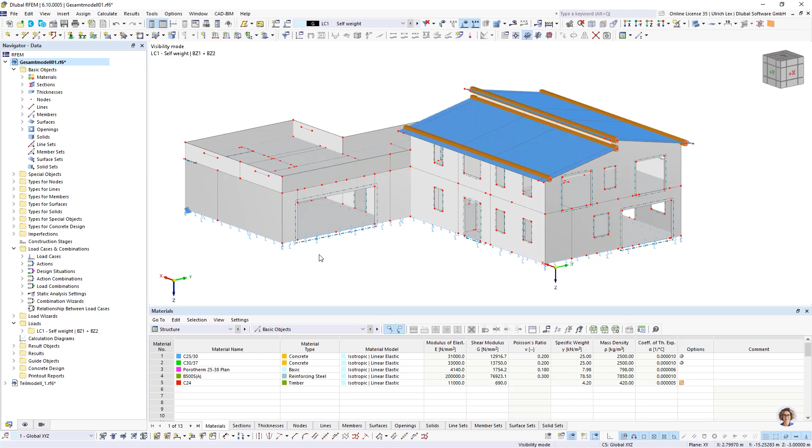On this garage it should be considered in the planning phase that the customer has the possibility to create a new living area on top of the garage. The difficulty is that maybe the concrete slab has to be designed for both load situations. There are different loads at the different stages, and this is what we want to consider with the add-on construction stages.

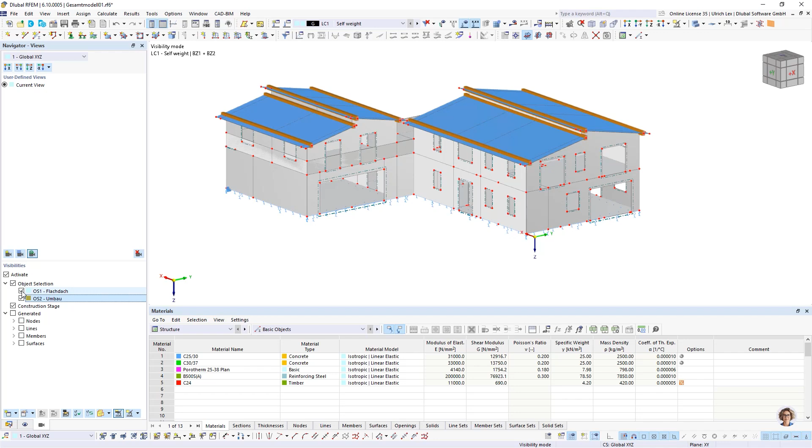For a better overview, just a moment, I've created some object selections where we can show this second stage with an additional living room, and the first stage with only the garage. For a better overview, I created as an example for today's webinar a second file where I have only modeled the garage, and I do not want to look today at this general building.

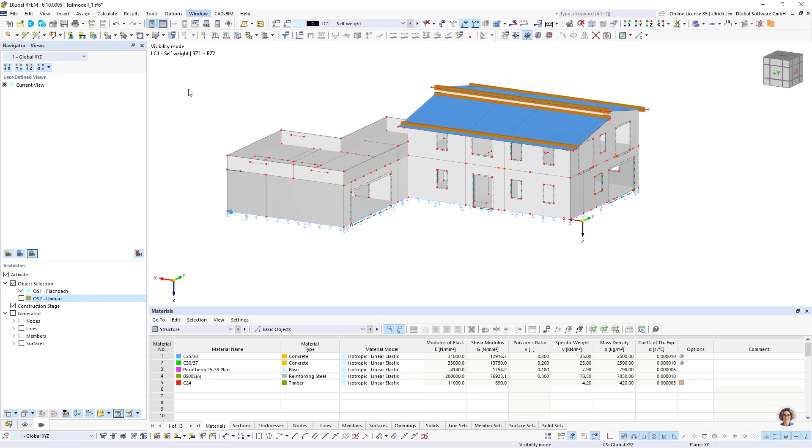That's why I switch to my second model, where only my garage is created. So at the beginning, we want to take a look at the used add-ons in RFEM. In the base data dialog, on the sheet add-ons, I see that I use today the construction stage analysis and the concrete add-on. Later on, I want to use the multi-layer surface only to show some features. The other settings I do not want to look at today.

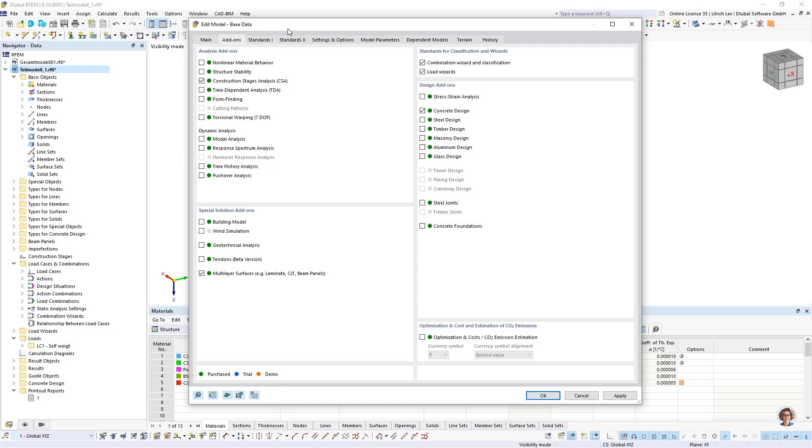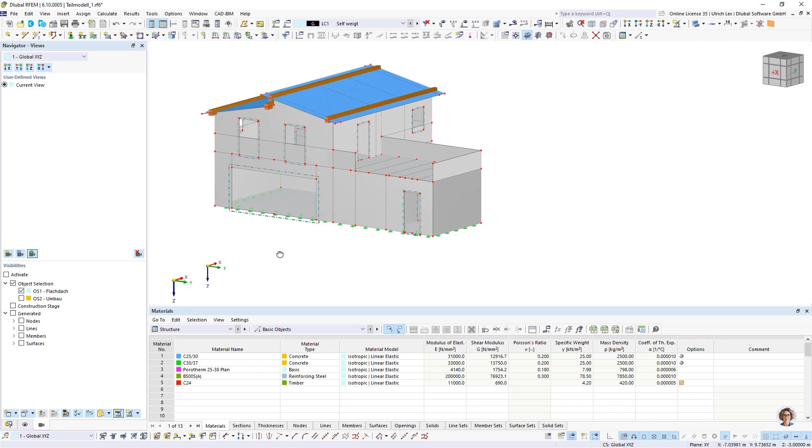So what did I do as a preparation? I created the whole surfaces, the whole structure, in RFEM. When I switch off my selections, you can see that I created different surfaces also in the same place. I have on one side the surface for this wall in stage 2, and I have the surface maybe for the handrail in stage 1. Here you have to be careful that these lines or nodes are not connected together.

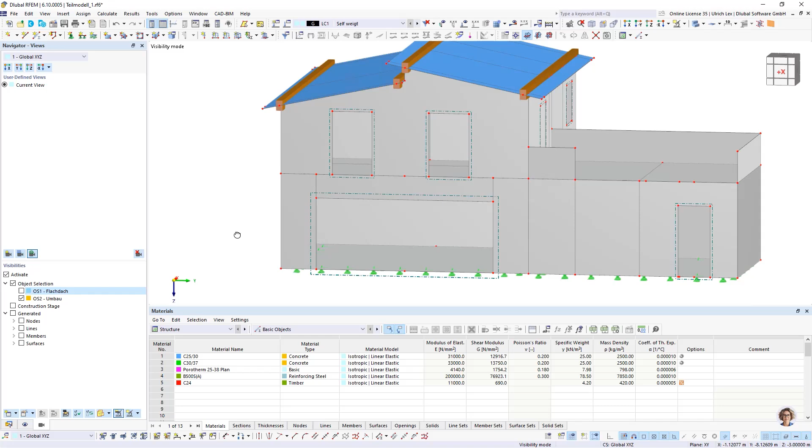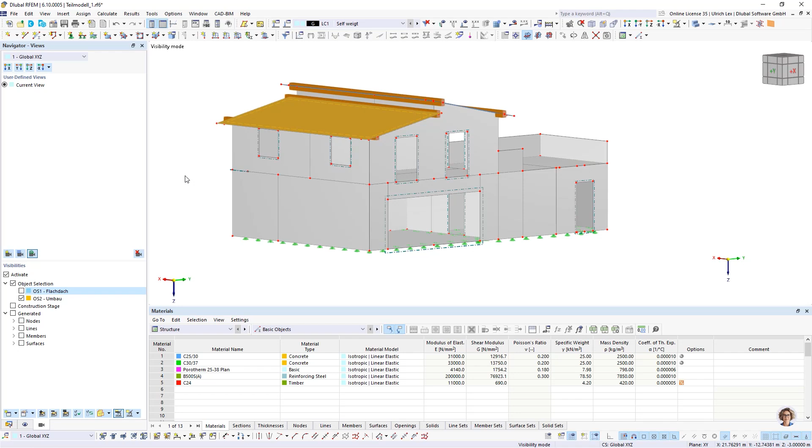It should be a clear modeling in this case, so that we really can have two different stages of these elements. On the top, I created a load for the roof. I created the load transfer surface, which transfers the load to both beams, and these beams are loading my walls.

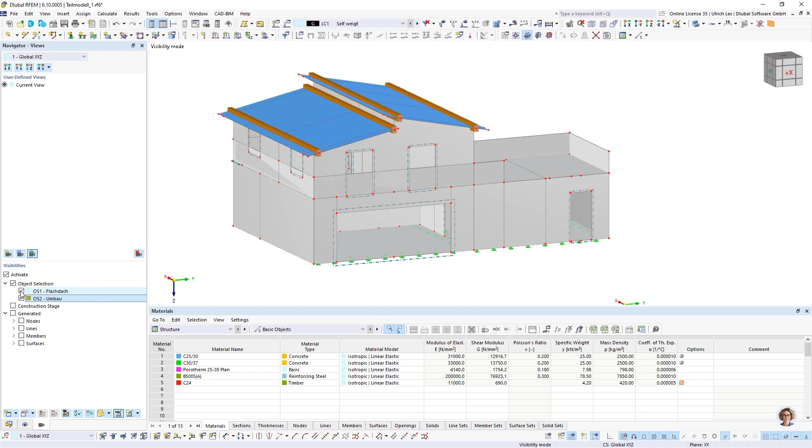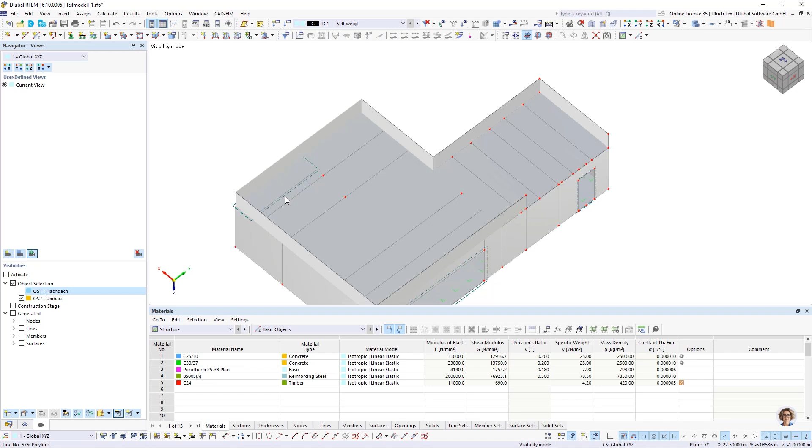So in the first stage, I only want to have this handrail, maybe like a roof on the roof. And in the second stage, I want to have an additional living room. So on the slab above the garage, there should also be, in the second stage, an opening for the stairs. And in the garage, an additional wall should be added in the second stage too.

So that are the main things of what I did before.

If you have done this, then we can start with preparation of the load cases. There I want to open my load case dialog. We also have to be careful that we create the different loads in different load cases. Later on, we can consider these different stages in the design situations. The design situations create then load combinations for the design. This is done automatically, but we have to decide, or we have to create the load cases.

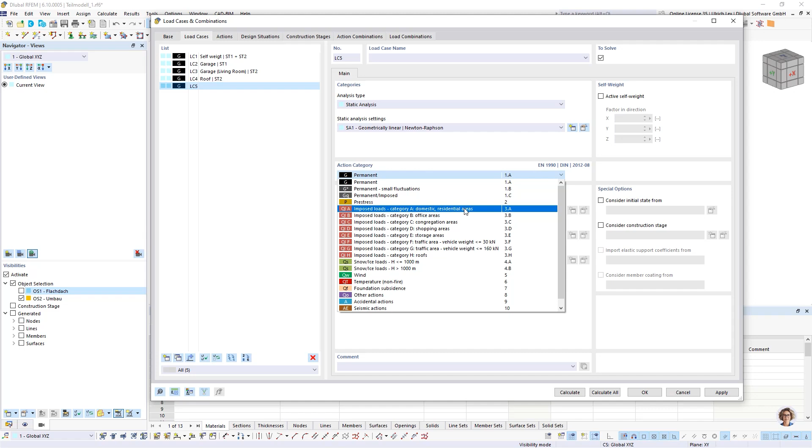As a live load case, I have one again for stage 1 and the second as stage 2. For stage 1 we can also use here the category of roofs.

So, and as a last load case, I want to create a snow load, acting in stage 2.

So my load cases are created. I can confirm this OK and can assign my loads.

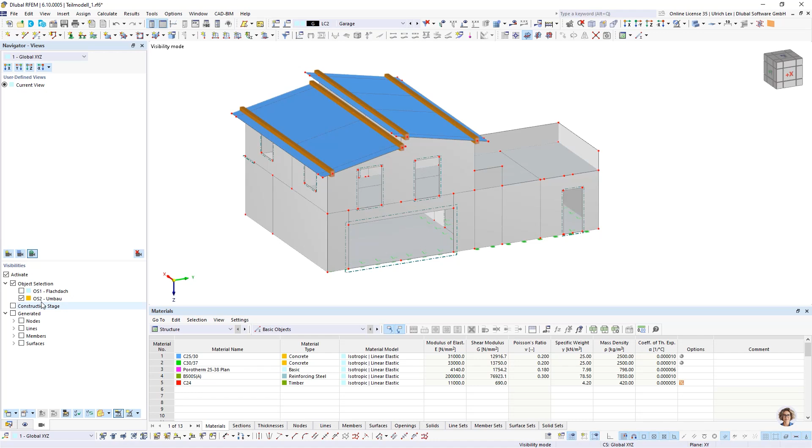I want to start in load case 1. Load case 1 was only my self-weight, I do not have to consider any other one. Load case 2 was my loads on the garage, on the roof of the garage. Here I want to create a surface load with 2.3 kilonewton per square meter and assign it to my loads. I do not want to consider the loads in the garage today for our example.

So as a next load case is the garage as a living room. Here I want to use 1.45 kilonewton. I have to use it here.

And in the same, I had again my 0.3 for this part of the structure in stage 2.

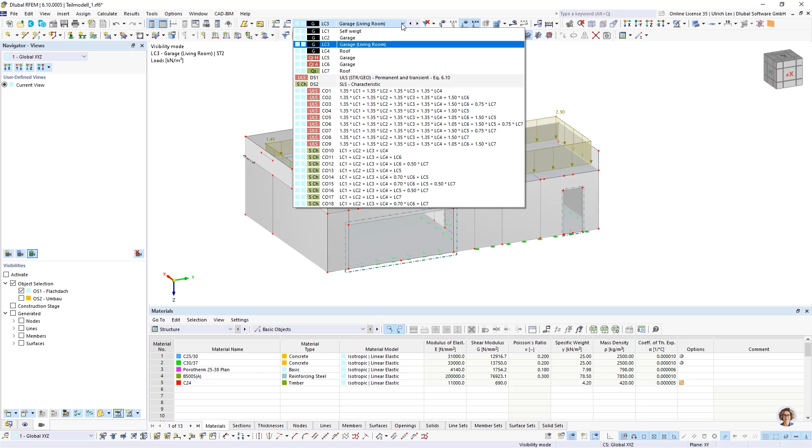So as the next one, I have to consider this roof. Again, a surface load as 1.9 kilonewton in stage 2. And I had to load these both surfaces and the top.

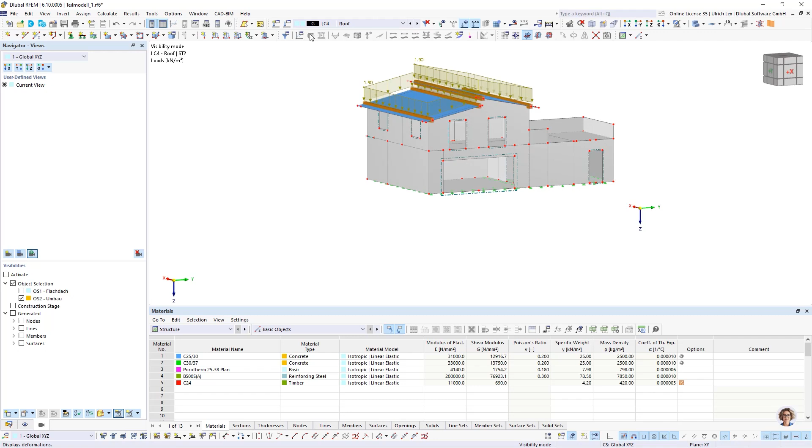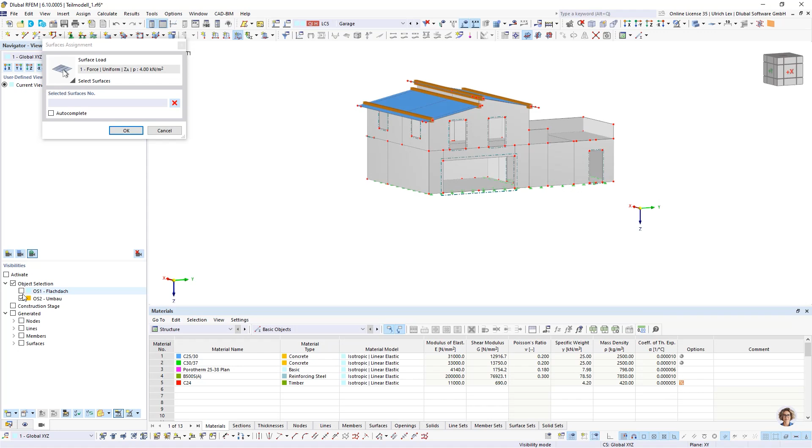Okay, the next load I want to consider is my garage load in load case 5, as 4 kilonewton maybe. And you see, when you created this object selections, then you can switch easily between both stages before the stages are created.

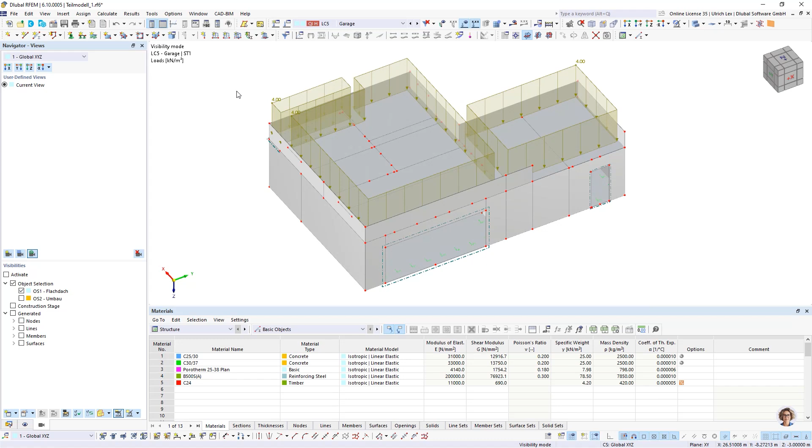And as a next part, the load case for stage 2. Here I have on the one side my 4 kilonewton and on the other side a smaller value, and in the new living room.

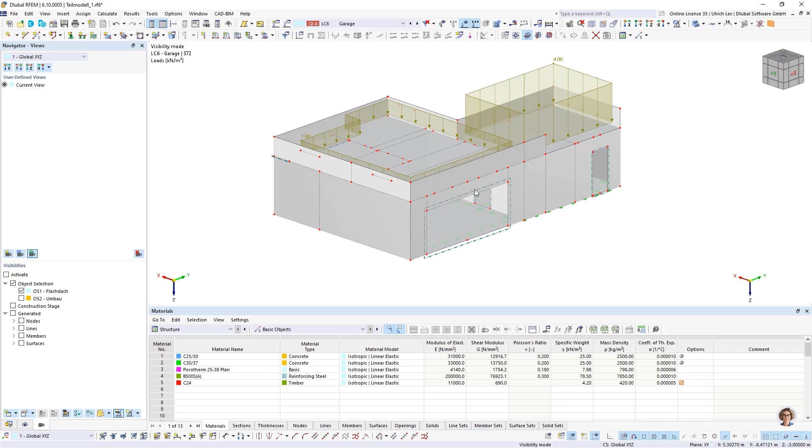So the last missing load case is my roof, my snow load. Today I want to create only a surface load too. Here we could easily use our load wizard for snow loads too.

So now I'm ready, I'm ready with the creation of the loads. Then we can continue with the creation of the different stages.

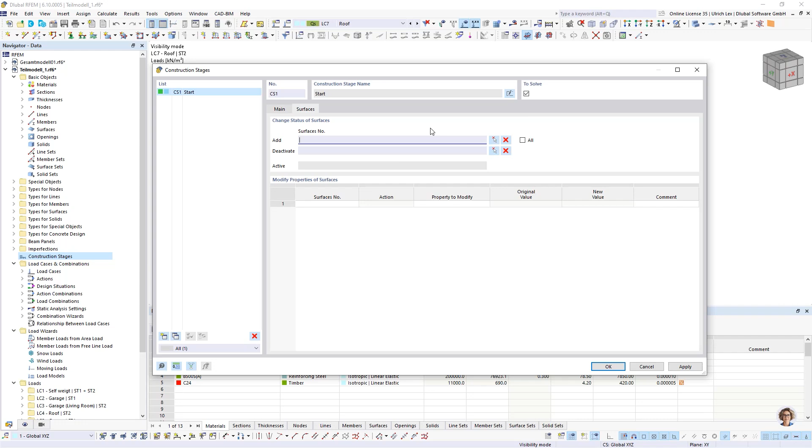If the add-on construction stages is checked on, then we have in the navigator, in the data navigator, the new option for construction stages. Here we can create a new one. As a first stage, I want to add my surfaces, which are active in the first stage. Here I can check on surface and add some surface.

I can switch to my object selections and select all surfaces for this stage. I can add all members - no, members we do not have in this stage. I can create all nodal supports - we do not have. We do not have line supports here. The surface supports are always activated when the surface in this stage is active.

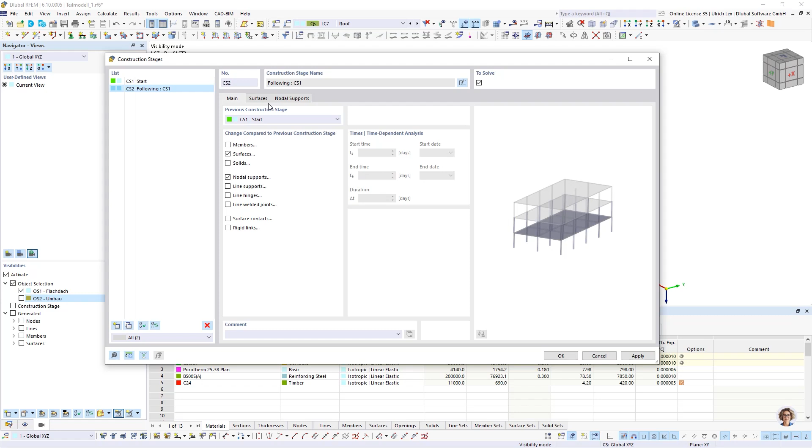So as a second stage, I have to create a new one. Here I can decide if it's a completely new stage, or if this second stage is following the first stage, so that I have some surfaces activated or not. In our case, I want to follow the first stage and have to modify the surfaces.

Here I have to deactivate some surface. When I take a look, I want to deactivate this surfaces for the handrail. Okay, and I have to activate some new surfaces.

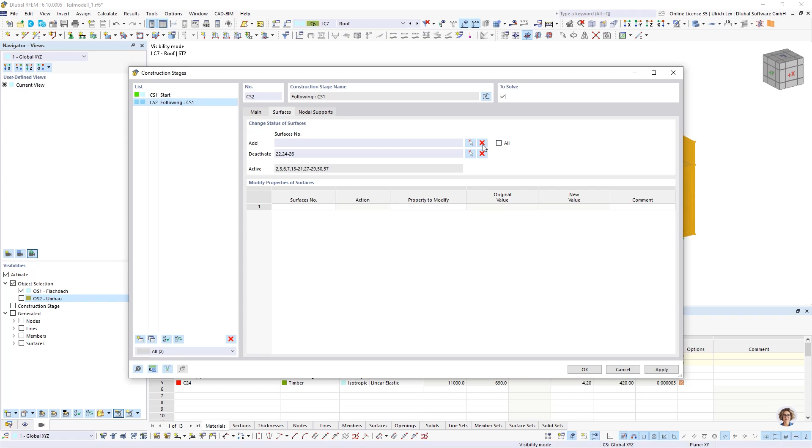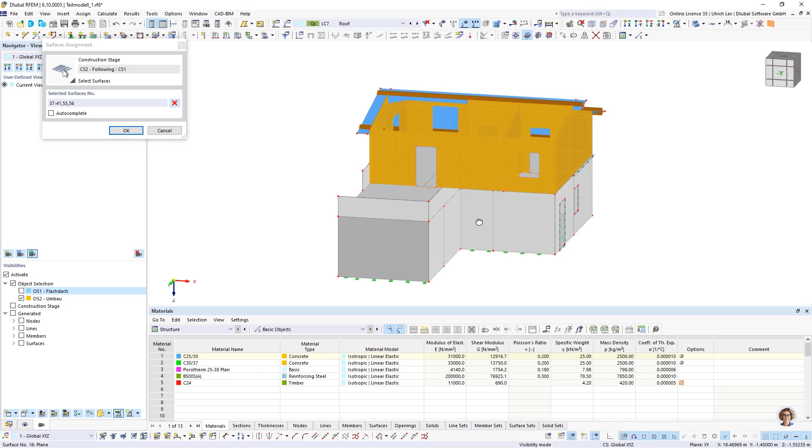And all these surfaces of the living room. Here in the middle is one, and the second one, and here's the third one, and on the ground floor an additional wall.

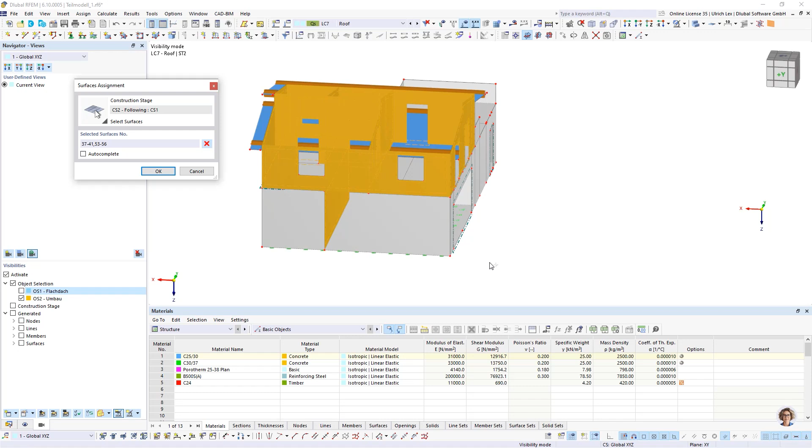Here you see it is important that all objects are created before, because when we have to change something afterwards, it would be very unclear what is added, what is not added, what is acting in each stage. So it is a better way to create all objects before you create the different stages. Here you can continue with OK.

In the second stage, also the members on the roof are active. Solids we do not have. Line supports we do not have. Then we can continue with OK.

And the different stages are created. We see stage 1 and stage 2. These stages are now created also in the overview here. And if you click on this stage, you see also when my object selections are off, you see, when you click on these stages, always what is active in this stage and what not.

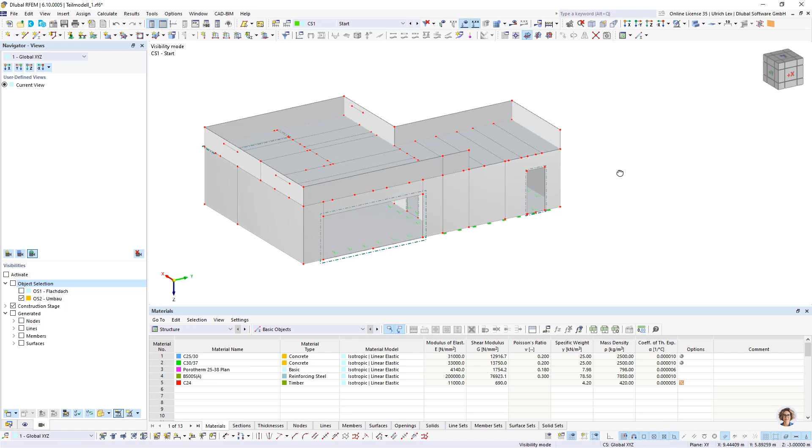Here I see in my second stage that the load transfer surfaces are missing, and my surface from my opening from the stair is not there too. So I have to modify stage 2.

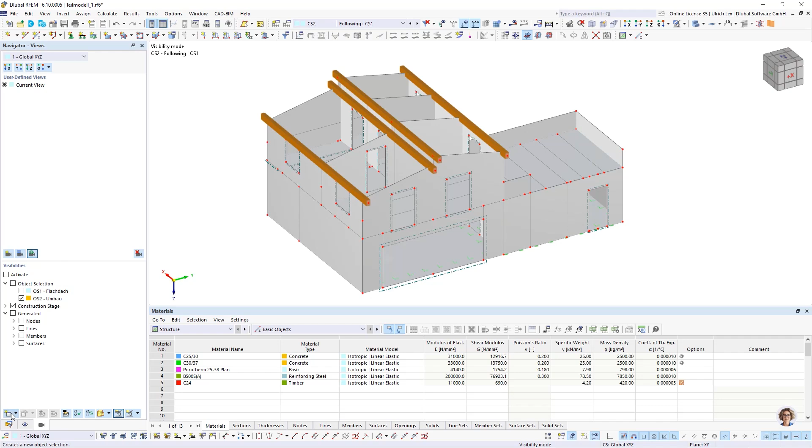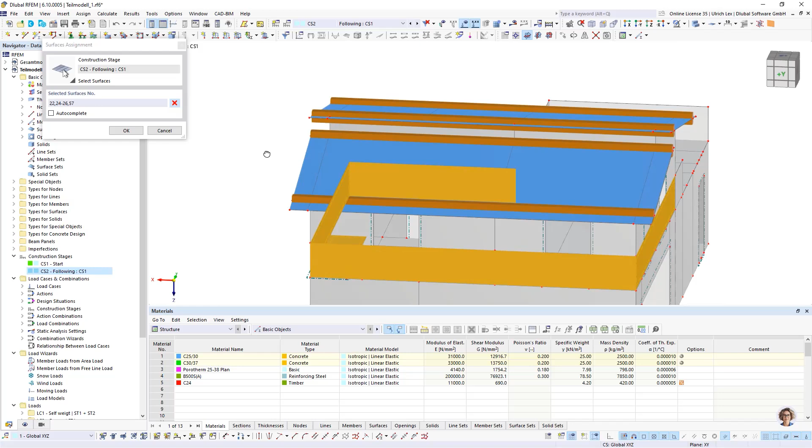I have to go to surfaces. I have to add here both surfaces on the roof, and I have to deactivate the surface in the slab. Okay.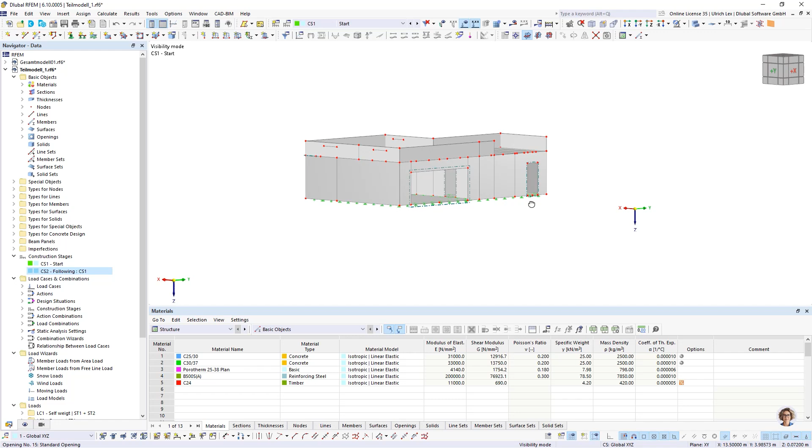Now I can check it again. And here I see the opening is there. And in stage 1, it is not. So this is an easy check if everything is okay or not.

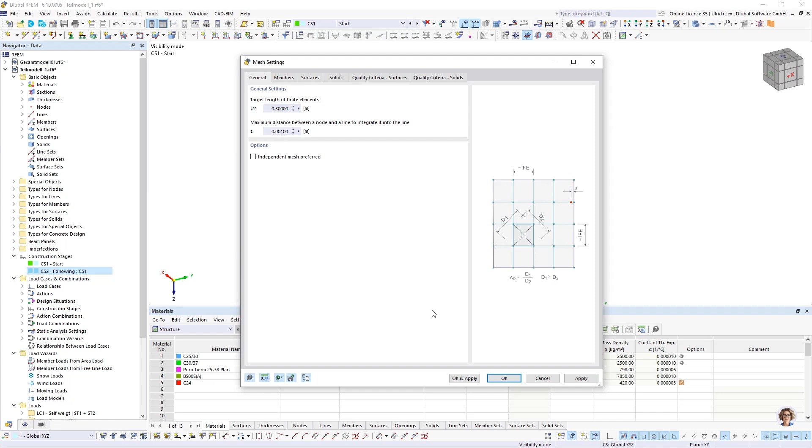So on this stage, we can also take a look on the FE mesh. You can take a look on the FE mesh settings, and maybe change the default settings. I used here 0.3 meters, and take a look if it is possible to create a mesh, if the modeling works. This is a hint if the modeling is okay or not. When the mesh could not be created, then there is something wrong in the modeling. So this is a good check if everything is okay.

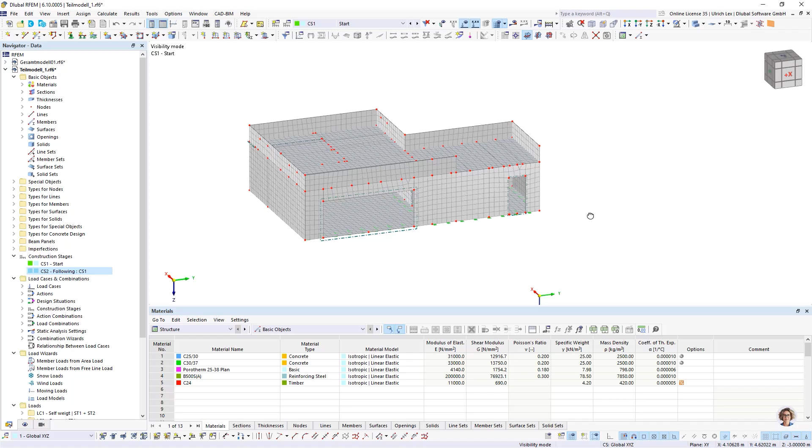That's why I want to create it. And then I can display my mesh. The mesh looks good, so the modeling was successful, I would say. We can also take a look on the second stage. The modeling, the mesh, is also good too.

As a next part, we can go to our loads, load combination, load cases and load combinations. Here we have created our load cases with comments.

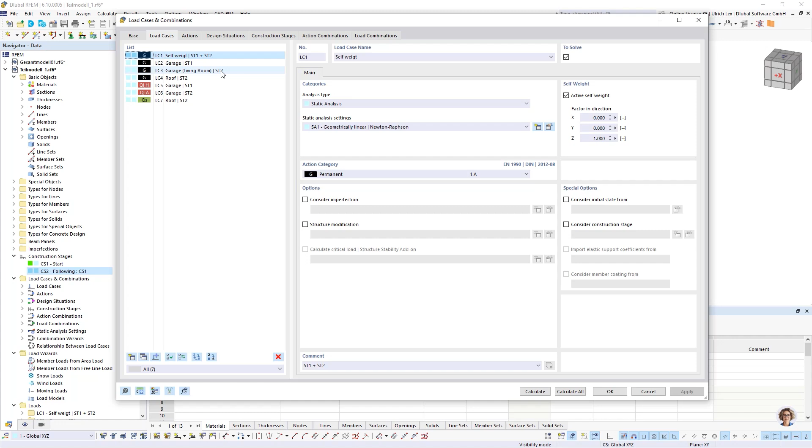So as a second step, we should assign the load cases to the different construction stages. For this, we go to the construction stages, and here we start with stage 1. We can say, okay, my load cases, here load case 1 is acting, here load case 2 is acting. Load cases 3 and 4 are not acting because I see it on my comment. It is load case 5 acting, and the other two load cases are not acting.

The same I can do for stage 2, where I have load case 3, load case 4, load case 6, and load case 7. Now you can see because load case 2 is self-weight, or is permanent in stage 1.

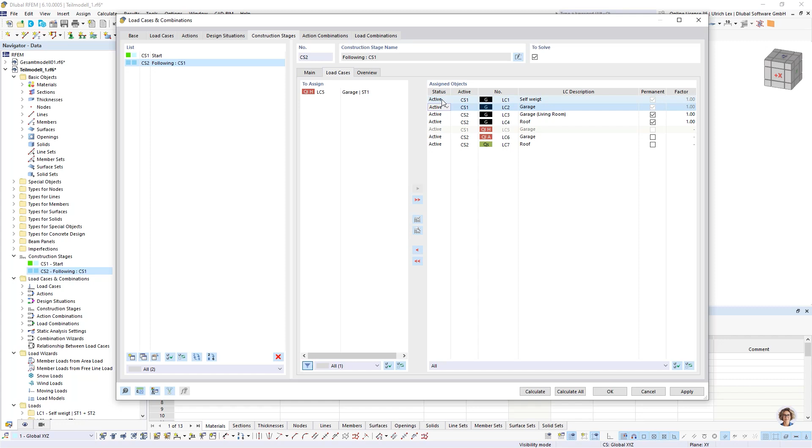So this would be acting in stage 2 again. That's why here I can say the status is not active, more it's inactive in stage 2, because load case 2 should not be acting. Instead of load case 2, it is load case 3 acting.

For the live load, it's not necessary to deactivate this load case because this is not permanent. So this is not acting automatically in stage 2. Here I could add it when it would be acting, but it does not in our case.

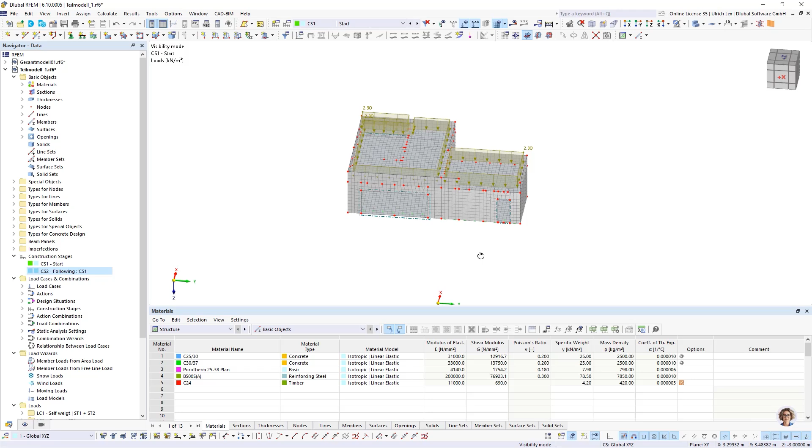So now when I take a look on the stages in the graphic, I can see my different stages with the loads, with the different loads acting. This is the first stage, and here's the second stage.

So as the next part, I had to decide for what stage the design should be done. This I can do with the design situations. On the design situation, I can do the settings that one construction stage is acting. Here I have two different design situations, one for the ULS design and the second for the SLS design.

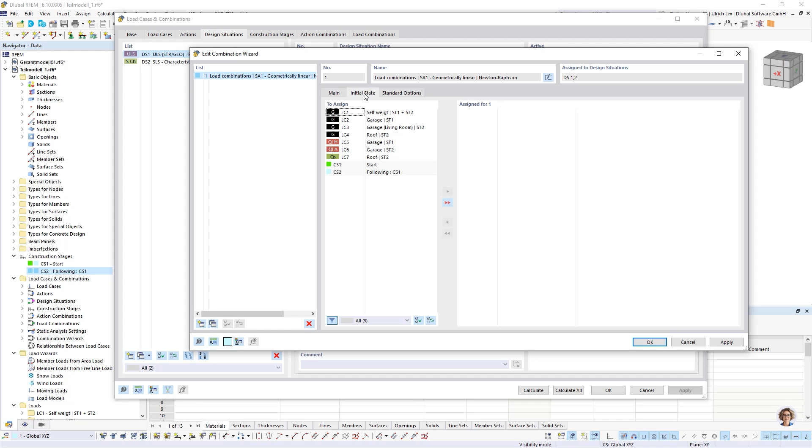Here I can now use a combination wizard, go to the detail setting of this combination wizard, and can say I want to consider some initial state for this on this wizard. On this initial state, I want to consider my stage 1.

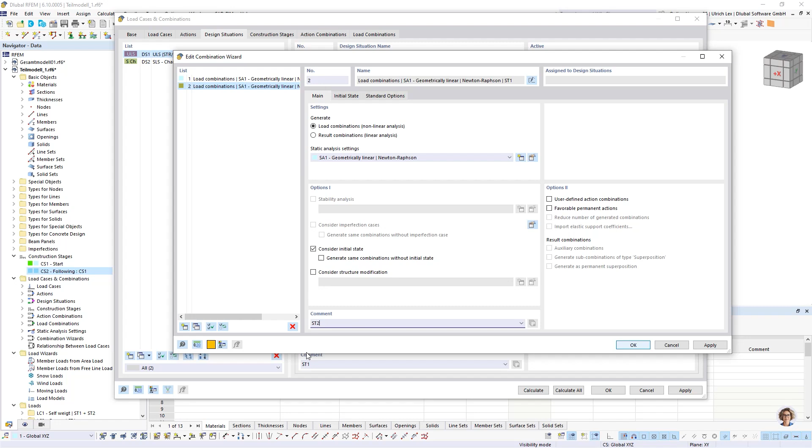Okay, and I add here again my comment stage 1. Here I can create just a moment here as stage 1. Here I can create a second wizard with a copy of the first one and say, okay, here it's stage 2, and change my initial state from stage 1 to stage 2.

So I have now design situation 1 and 2, where I want to consider my stage 1. Now I can create a copy of both design situations and can say, okay, for design situation 3 and 4, I want to consider stage 2.

What is the program doing? When we take a look on the load combinations, we can see that a lot of load combinations are created automatically. As the first load combinations, CO1 till CO4 are created. These are created from design situation 1. It is considered as construction stage 1.

For combination 5 till 14, stage 2 is considered. The combinations 15 and 16 are internally created, so that it could be considered here on the special options. Here you cannot change it because it is created automatically with this combination wizard.

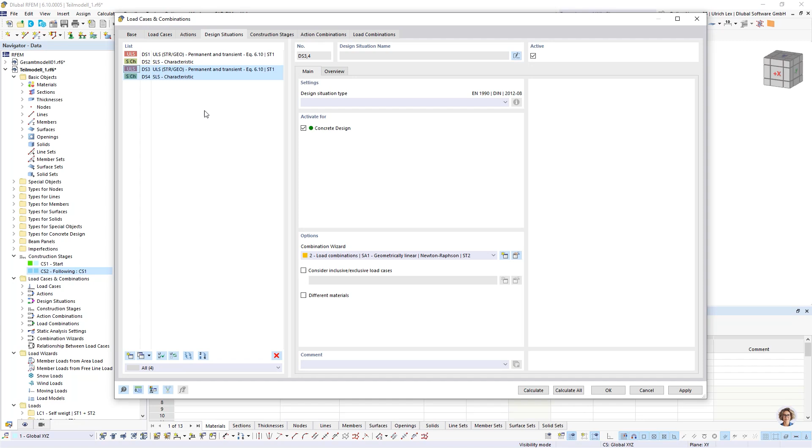So this is the option that I can design these different stages when I create additional design situations and therefore create additional load combinations for the different stages.

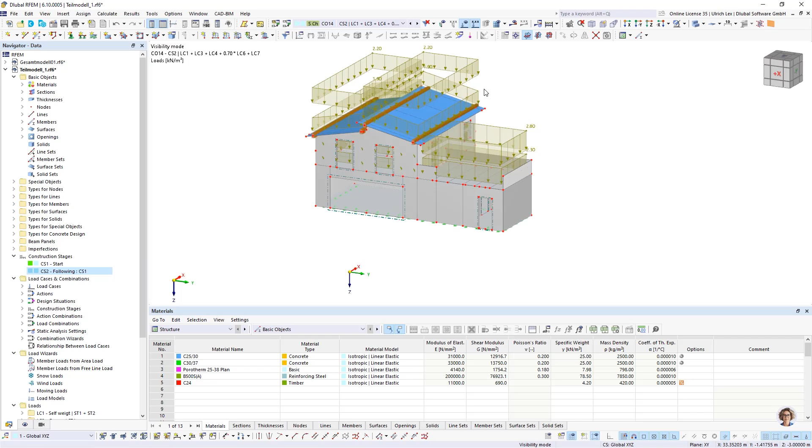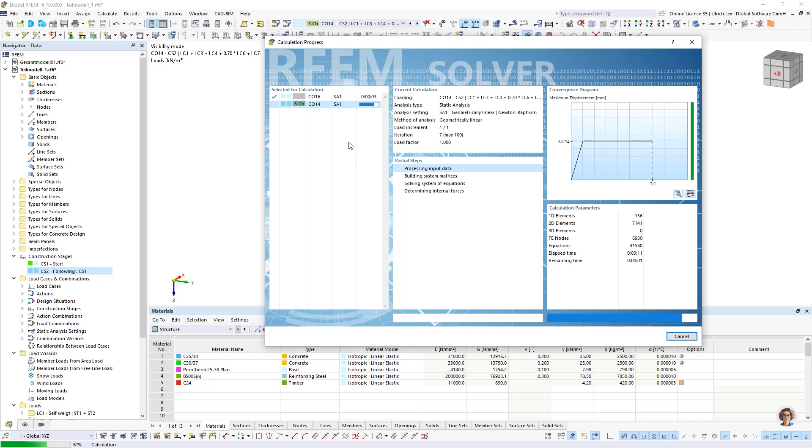Okay, there we can continue with OK. And we can compute our load combinations. Now I compute only one load combination. But I can continue with calculate all combinations.

You can see in the calculation process that all combinations are computed, and later on the concrete design is done. Here I did not take a look at it. I will do it now.

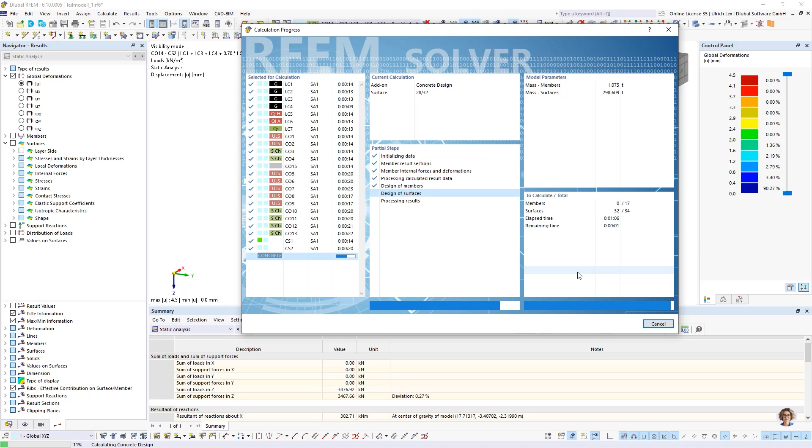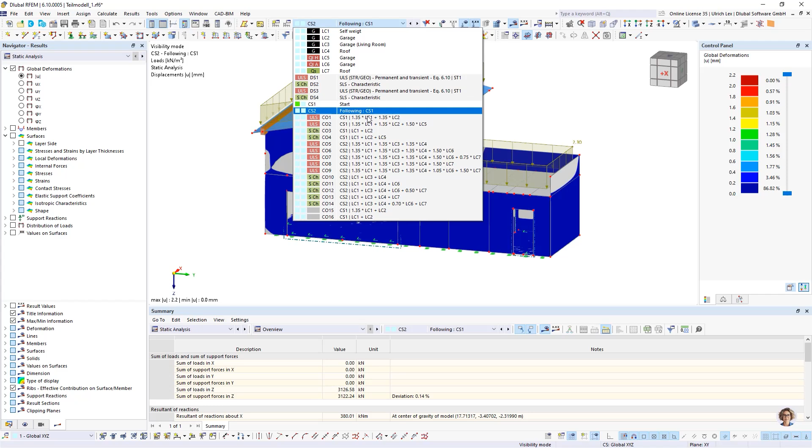So if the calculation is finished, we can take a look on the results. Here we can also see that maybe for combination 2, this stage 1 is considered with loads and also with surfaces, and also for maybe combination 5, where stage 2 is considered, that the surfaces for stage 2 are considered.

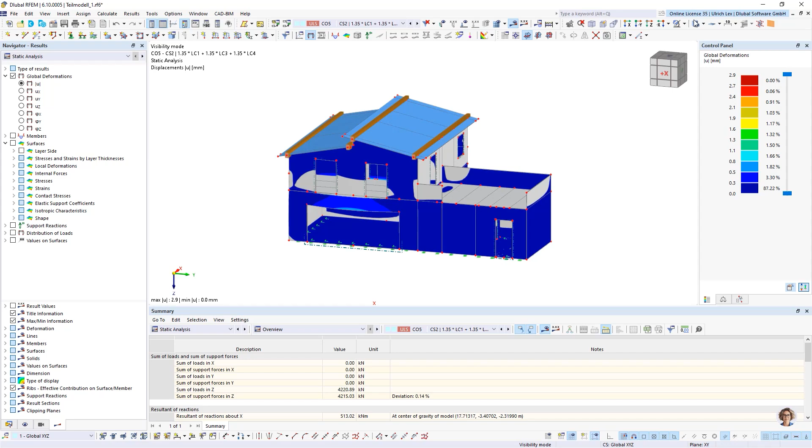Here you can check the results as it is used in RFEM. You have all deformations, you have all internal forces, you can check all stresses. You can take a look on the final results, or you can change to the different stages, to the difference of the results. It's up to you.

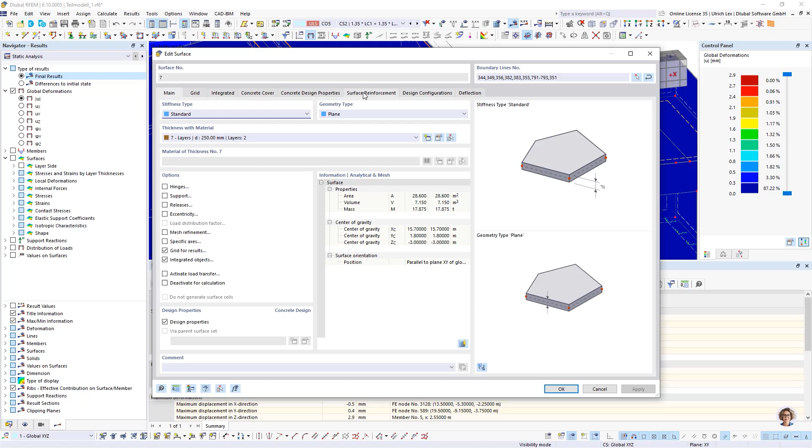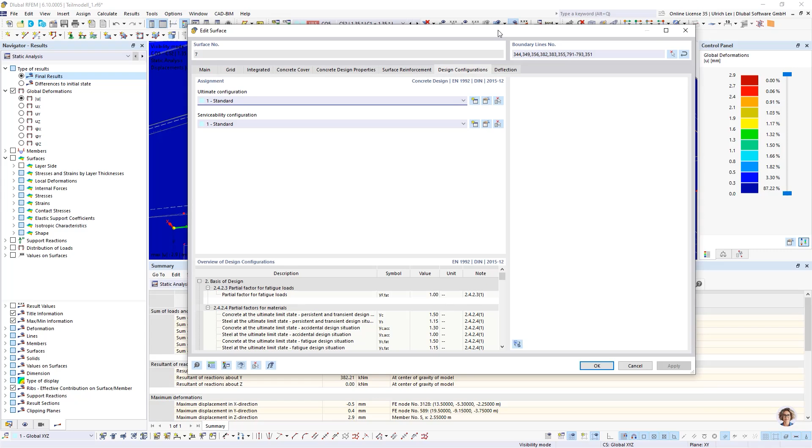So what we saw in the calculation dialog before, the concrete add-on was running too. For the concrete running, it is necessary that you do the surfaces settings for the concrete. You have to define the properties for the design. You have to create the reinforcement, and you have to choose design configurations. But I do not want to take a closer look today, because we have many webinars for concrete design on this part.

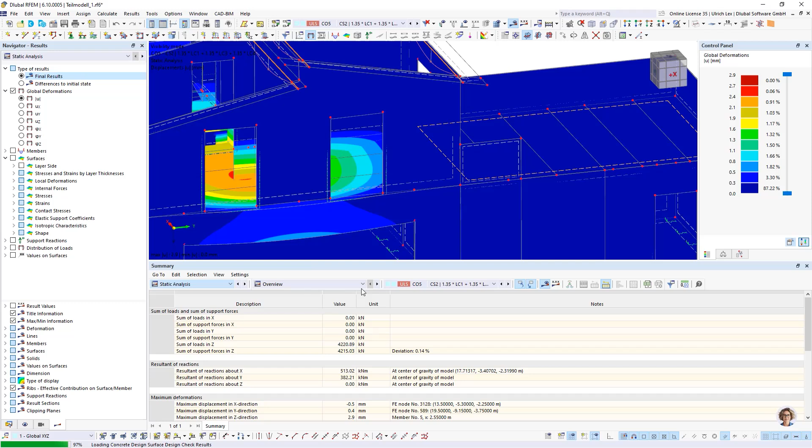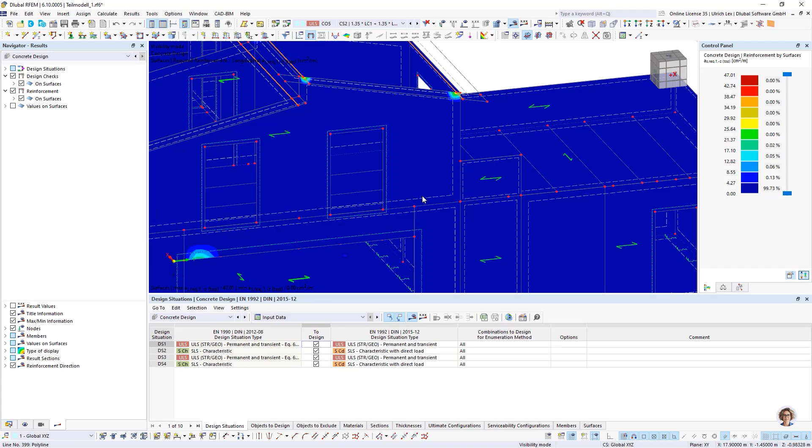So this was done by myself before, so that the design or the calculation was running. You can also see when we take a look on the concrete add-on, when we take a look on the input data, that all design situations are checked to design, so that stage 1 and stage 2 are designed.

This is a benefit of the add-on construction stages, that we have both situations, or that we can design both situations in one file. You do not have to use two different files and compare the results. It is possible here to use one file and design these two different situations with different geometry maybe and different loads.

So as the last part, I want to take a look at the printout report. Here we can open a new printout report. When we create a new printout report, there are a lot of tables, a lot of things included by default in the printout report. You can choose to remove it from the printout report or check it in the dialog for what you want.

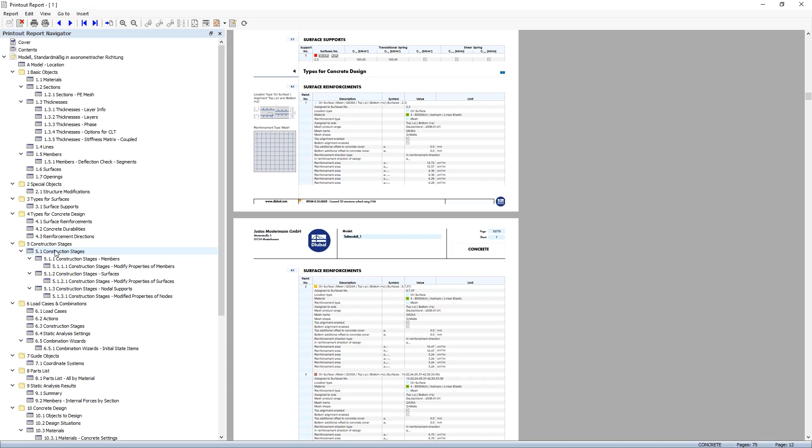For the different stages, they are documented here by tables. Here it would be necessary or sensible to add additional pictures, so that you can see the different stages, what is active or not.

Also, is it here good for the loads? When we take a look on the load cases, on the different loads, set all loads. Where is it?

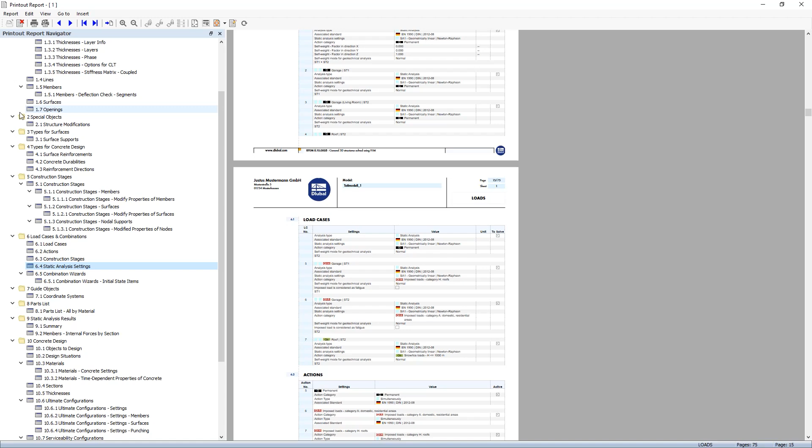It's not here in the moment. Just a moment, I have to open it again.

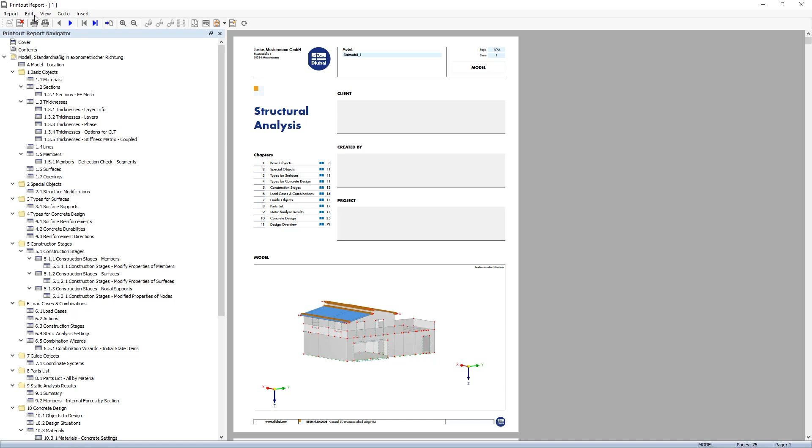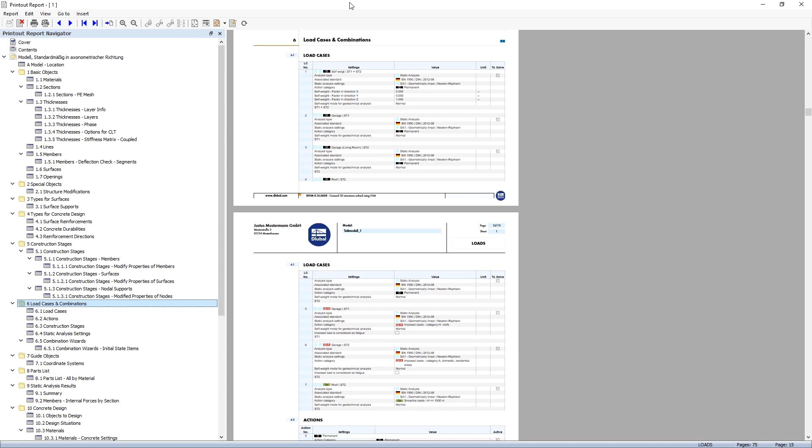The comments of the loads are documented in the printout report too. Here you can see, you can edit the printout reports when we have the loads. Then these comments are printed too, and you can see which load case is acting in the different stage. Here also the construction stages, a table for the construction stages where you see which load case is acting for it.

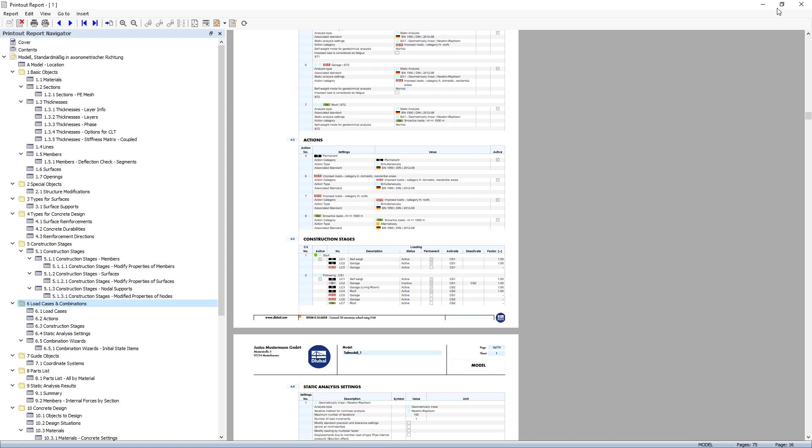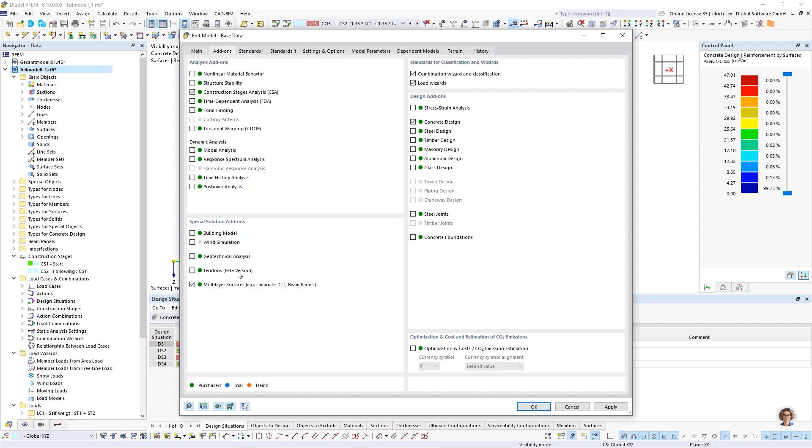So as a last thing what I want to show you today is an additional option. It's when I take a look on the slab above the garage. Here, when we take a look on the base data and when we activate the add-on multi-layer surface, then it is possible to create the thickness of this surface of this concrete slab as a layer.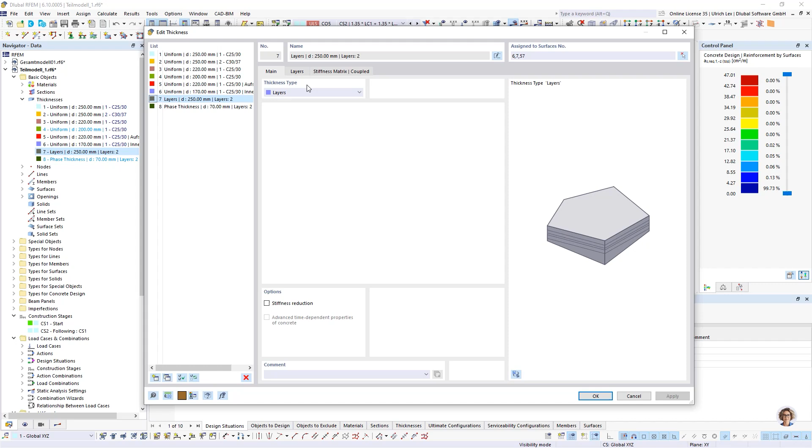It's maybe useful when this slab is on the one part a finished part or finished concrete part, and the second thing, in situ concrete slab. Here you can define different layers, maybe 70 millimeters for the finished part, and 180 in my case for the in situ slab.

And if you do it here as two different layers, you can create a thickness type. It's called phase thickness, where you can say, okay, only the first phase is active. I have this phase thickness, here I have the parent thickness, my thickness number 7, and only layer number 2 is active. Here layer 1 and 2 is active, but I want to say only my layer 2 is active.

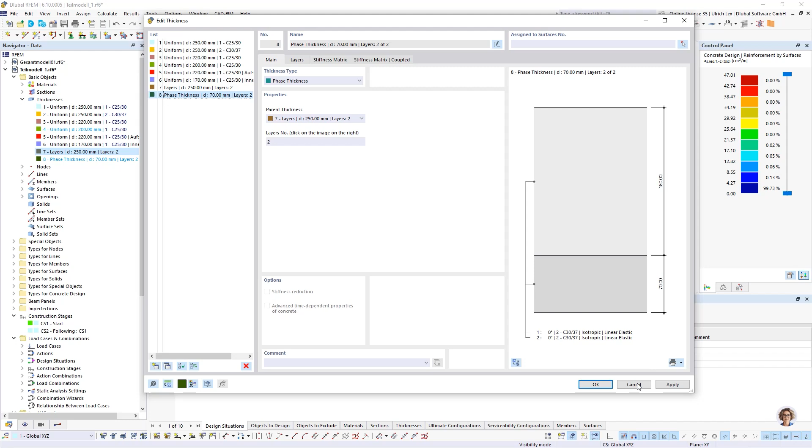And this I could use in the add-on construction stages too. When I create here a new stage, I mean when you want to do this, it would be more comfortable when you create this as a first stage. But it's no problem that we do it here now at the end. Then I can create here a new stage, or I can create a copy of stage 1.

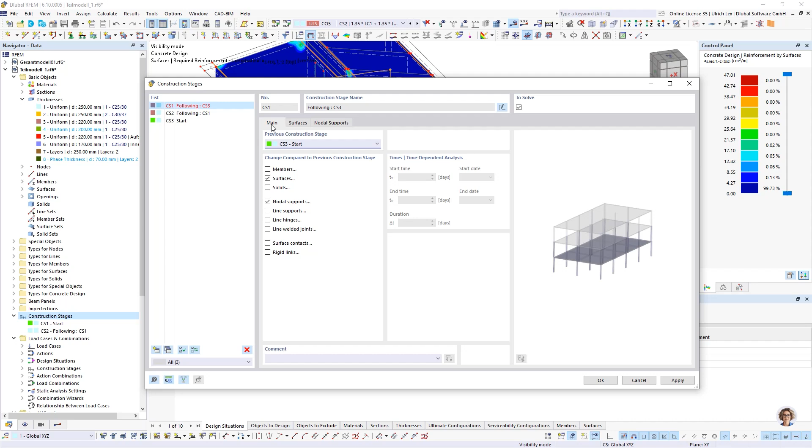I can say, okay, surfaces are, and I can say this stage 1 is then following stage 3. Here I had to add surface. Okay, I had to delete it here because it is active.

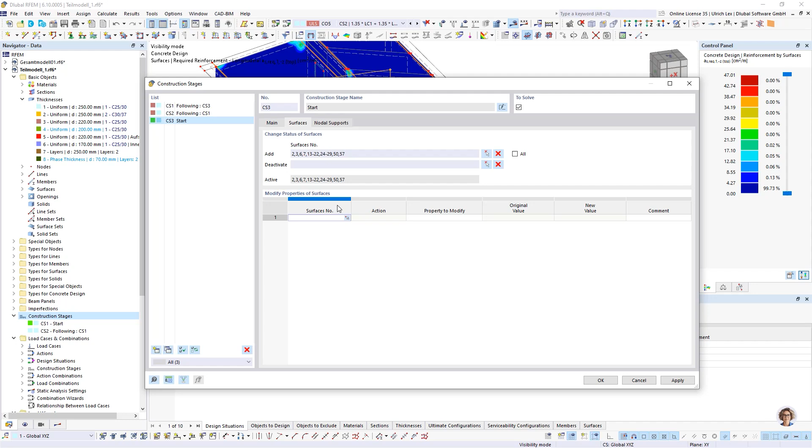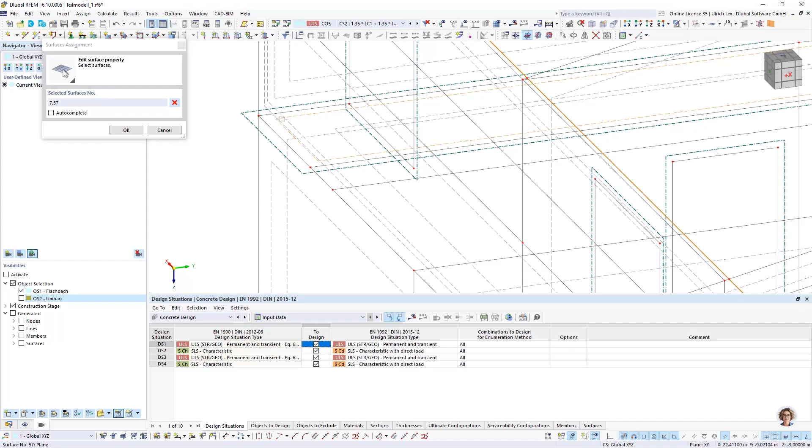And here in my third stage, I have now the possibility to modify the properties of the surface. I want to choose now my concrete slab, it's here, and this one.

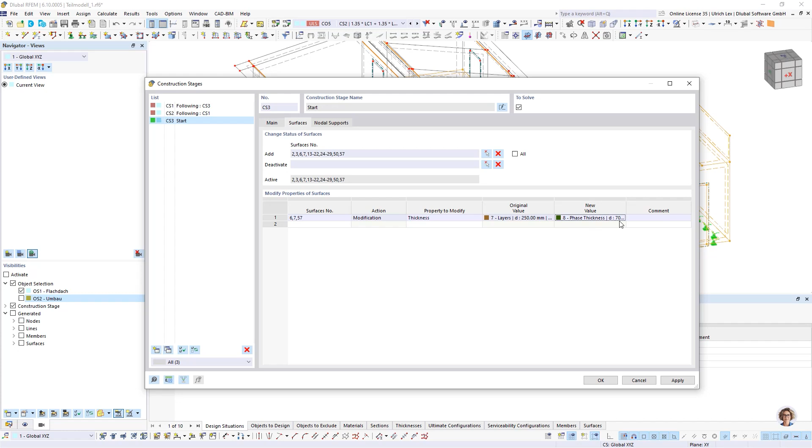Okay, I want to do a modification. I want to modify the thickness, and my original value is the layer number 7. In stage 1, it should only be acting my phase of this 70 millimeters. So this I can do as a first stage, where I can say, okay, I have this finished part of the slab, and the second part of the slab is an in situ concrete. Here I can continue with OK.

The results are deleted, and then it would be considered for this slab only in the first part, only the 70 millimeters of the concrete.

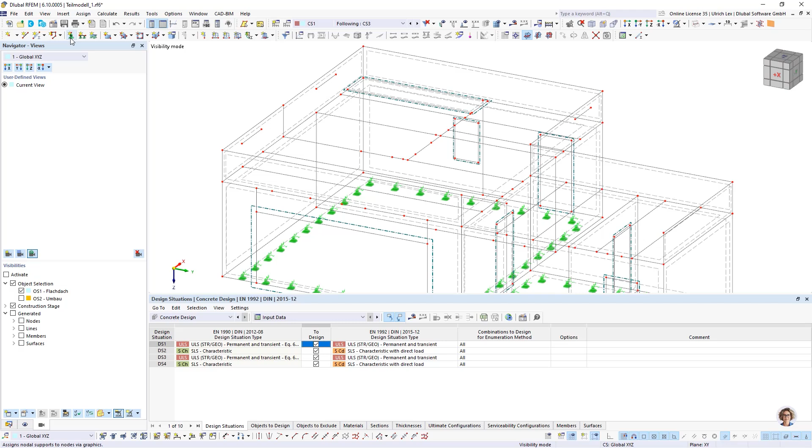Here I had to do some additional things. I do not want to do it now, it's only a description. I could create a new load case for the additional load for the in situ concrete. I could here add also new line supports, maybe for the construction stage, for the working stage, or for the building stage.

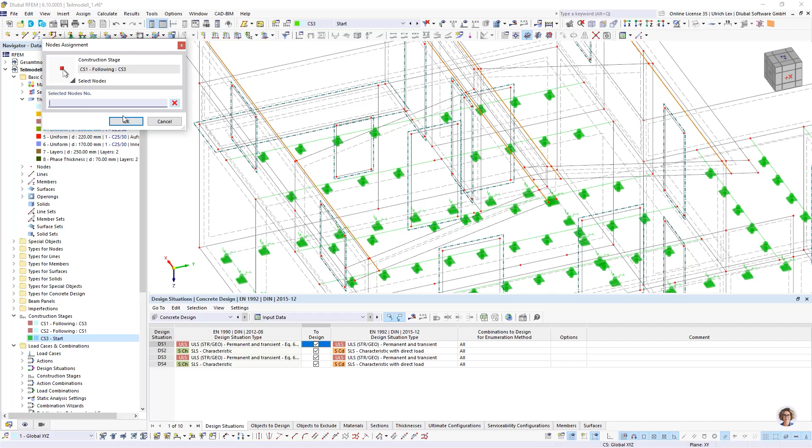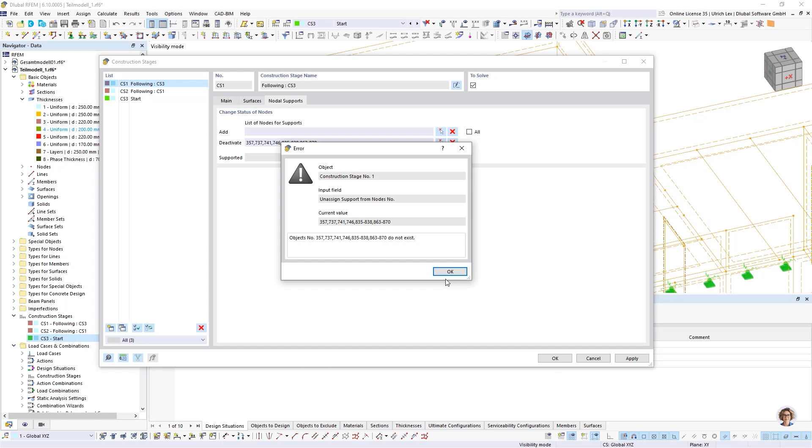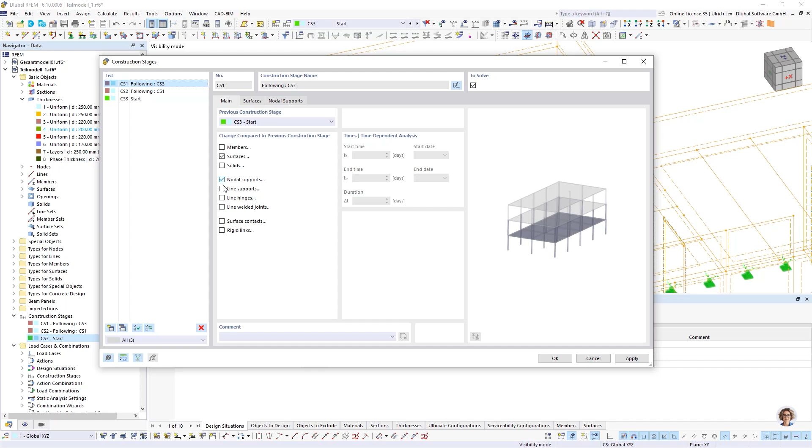So this I could add in the stage. Here is the stage where the line supports are acting. And I had to say in stage 1 that... I can do it easier, line supports. And in stage 1, I want to deactivate these line supports again. Just a moment. Yeah, line supports. Okay, just copy. And here I had to add line supports and want to deactivate it again.

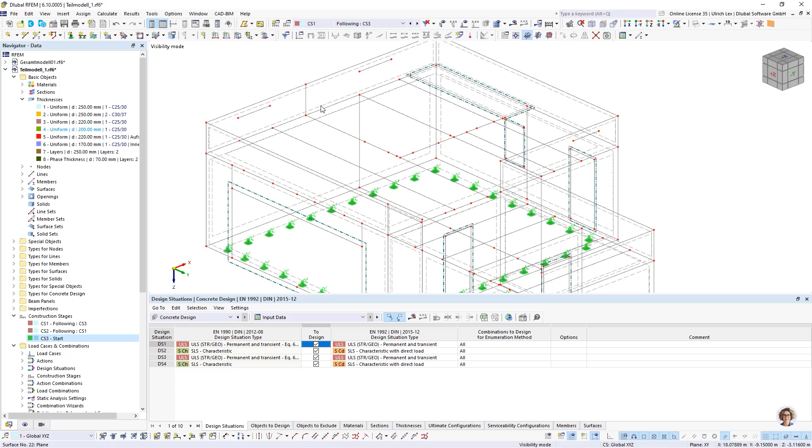Okay, then I have stage 3 as a supported surface, and in stage 1 it's my concrete slab again.

So this is all what I want to show you. I want to say thank you for listening, and I want to give back to Andreas.